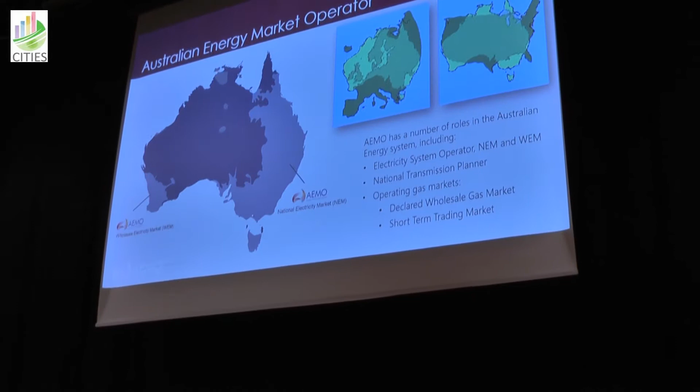So, as I said, I'm from Australia, work at the Australian Energy Market Operator. We've got a number of different roles, I've put some of them up there. We are the electricity system operator in the national electricity market, which is the light grey area.

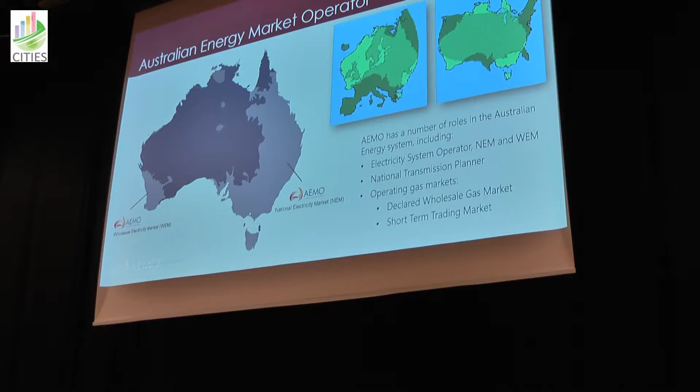That's in eastern Australia, about 85% of the population lives there. We're also a system operator at the wholesale electricity market over in Western Australia, which is the light grey area to the west. There's a few other small isolated systems we're not currently involved in, and then there's a whole lot where there's not really a grid supplied electricity.

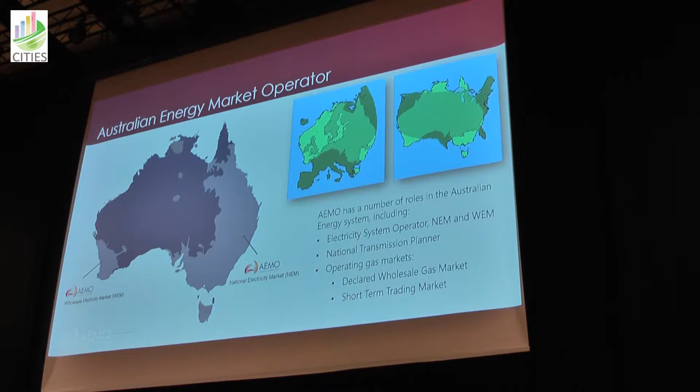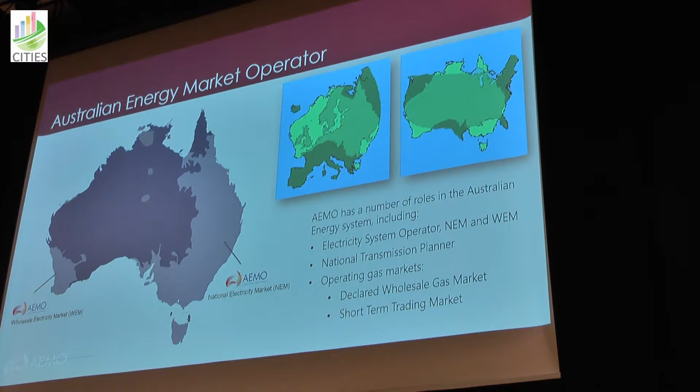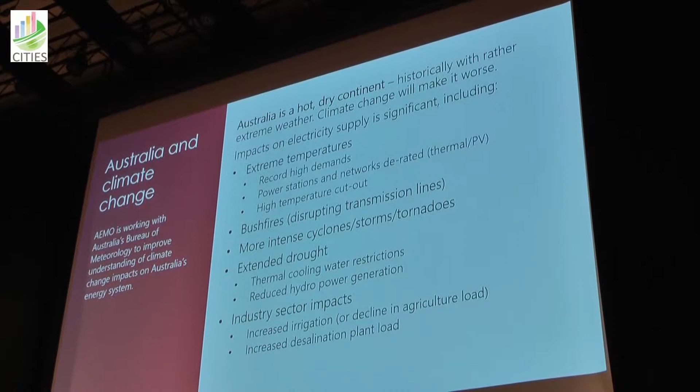There's significant impacts on electricity supply through extreme temperatures, driving record high demand levels, affecting power stations and networks through derating, reaching too high temperatures to operate efficiently, reaching potentially high temperature cutoffs, shutting off power stations.

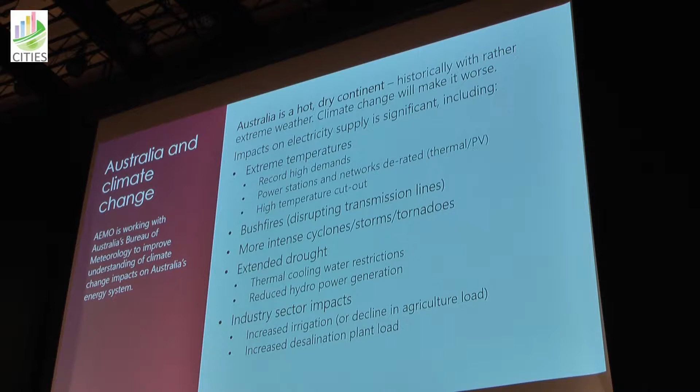Hot and dry climate is great for bushfires. Bushfires may affect transmission corridors, causing lines to be de-energized to prevent tripping of the lines. It drives more intense cyclones, storms and tornadoes that can affect electricity supply infrastructure. Extended droughts can affect the availability of cooling water for thermal plants and reduce water available for hydropower generation.

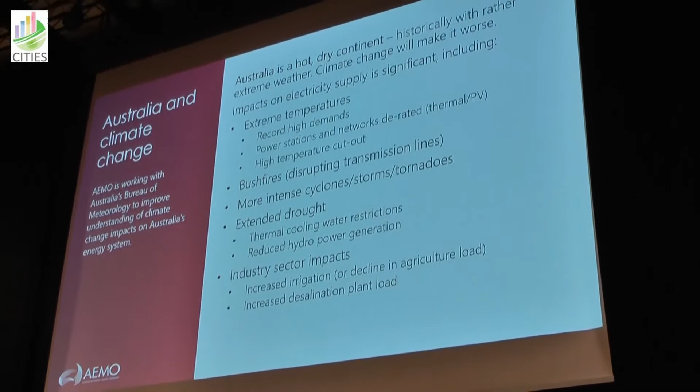There's other impacts to consider when planning the electricity system around industry sectors. What's happening with agriculture when there's long, prolonged droughts? Will we see reduced output and therefore reduced consumption at the processing of agricultural products? Or will we see increased demand because we're using additional water for irrigation and pumping? Then there's additional electricity used for desalination to firm up the water supplies for major cities.

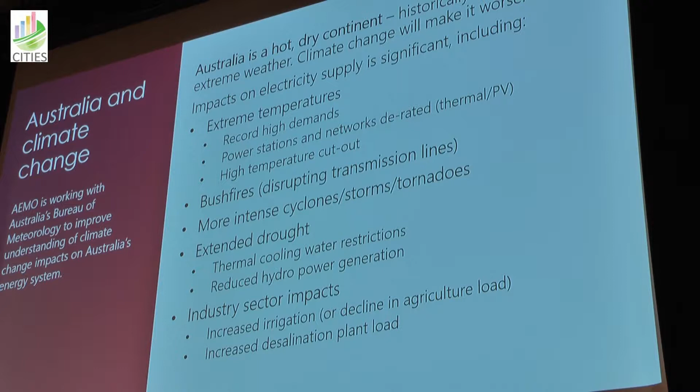So we're working with the Australian Bureau of Meteorology to improve understanding of climate change and its impact on Australia's energy system.

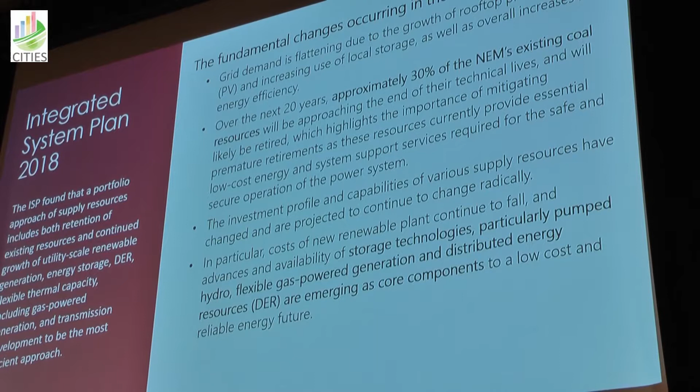I'll try to catch up on time, so I'll skim briefly through that. We do some integrated system plans. This is the last one we did last year, and it's showing the energy system is transforming. We all know that, it's happening in Australia as well. Interestingly, we've seen renewables coming down in price, as we've heard. So pretty much regardless of what scenario we're looking at, the future is renewable.

What's really different is the pace of transformation towards this renewable system and what technologies we're using for firming. Is it going to be battery storage? Is it pumped hydro? Flexible gas power generation, or something else? Could be demand side participation, for instance.

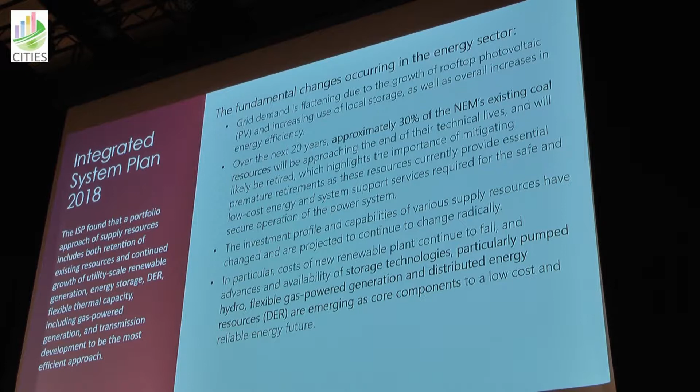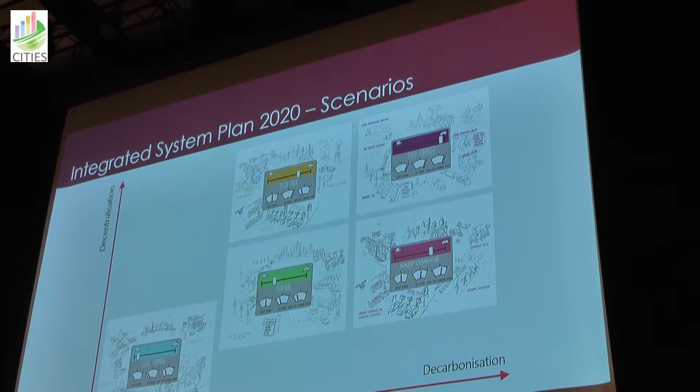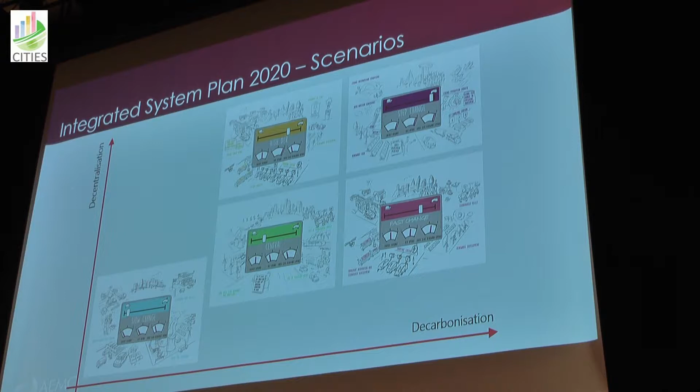We're currently working on our next integrated system plan to be released next year. The draft outcomes are actually to be published potentially next week. We've defined 5 scenarios here, ranging by the slope, the rate of change. The green scenario is kind of a central outlook. If we continue up toward the 2 axes of decarbonization and decentralization, we see there's a scenario in the top corner called step change.

I was about to say I'm pretty proud that I've got this scenario, which I shouldn't be, because that's actually the only scenario where we reach the Paris Agreement. But we felt we need at least one scenario that had that, and last time we did this, we didn't have a scenario that actually did.

It does have a strong focus on the electricity system, but also the interaction with other sectors on the electrification of industry, heating, and transportation included. Generally, the expectation is, based on what we had last year, that there is no silver bullet. The solution to achieve what we want, to get to the Paris Agreement, includes a range of technologies at very large scale deployment.

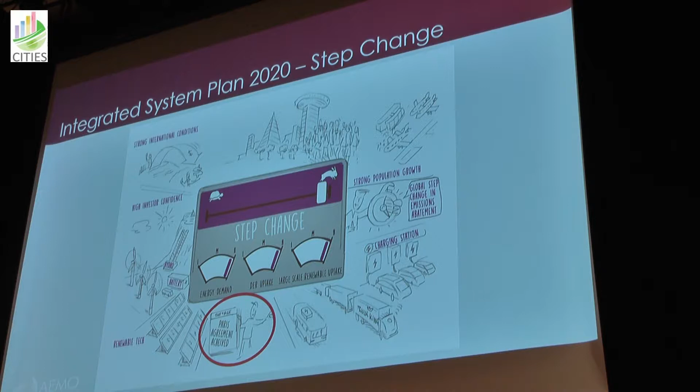The starting point, I'll focus mainly on the national electricity market, the market in the east, which is the bigger of them. It's probably not that much you need to know. It's about 200 terawatt hours of electricity consumed annually, peak demand of around 33,000 megawatts, and close to 60,000 megawatts of installed capacity now. You can see some of the values there, how quickly some of these capacities have been built.

Last year, about 3,000 megawatts of renewables were built alone. Just in the first 2 months, there was another 6,000 megawatts of potential projects announced, seeking approvals at various stages through the approvals process. So we have seen this year a very fast transformation already.

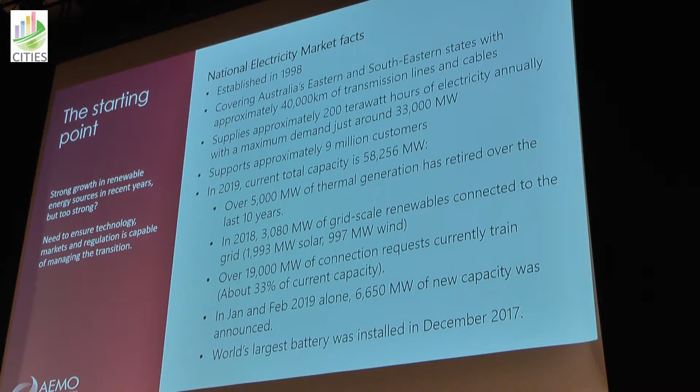But has the growth become too strong? There's a lot of things that need to be taken care of to make sure that we're still providing reliable, secure electricity. And we don't want to be a blocker for achieving a step change scenario.

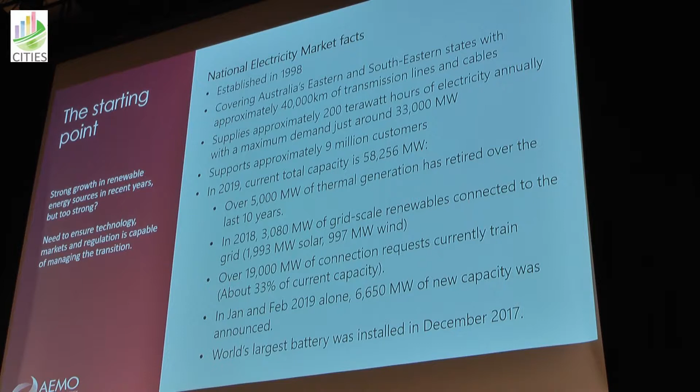So we are working along a range of initiatives to ensure that should we, or the politicians and population of Australia, want a step change scenario, we'll be there to help them. So where we're heading from now, this is a slide I borrowed from Bloomberg.

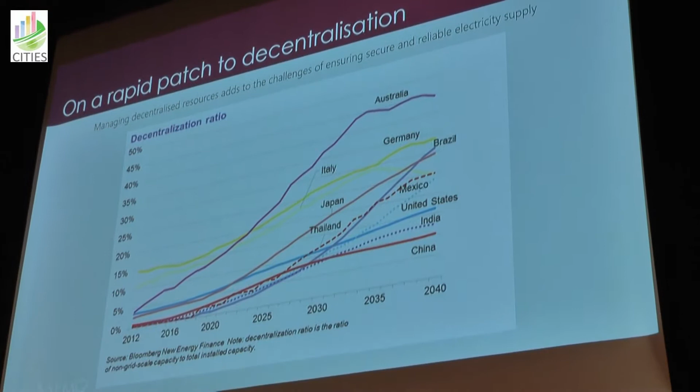A lot of things happening behind the meter, or the decentralization. Australia's gone from being very much focused on big coal-fired power plants to a rapid rise of supply at household level.

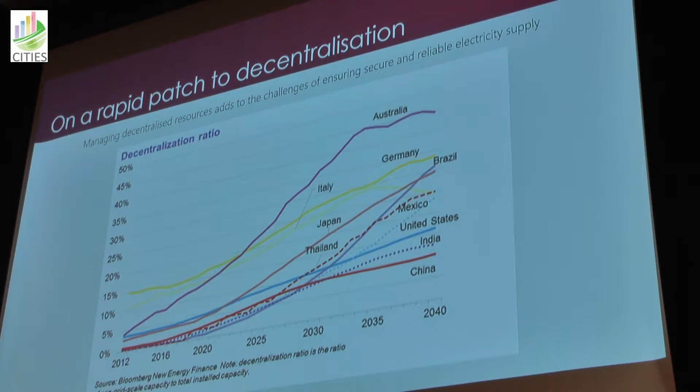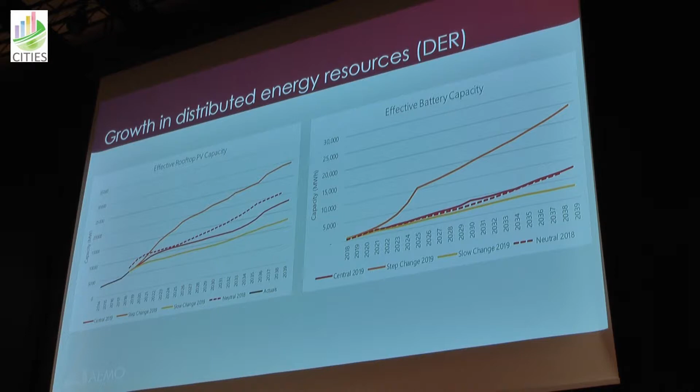This is driven almost entirely by growth in rooftop PV systems, or small-scale PV systems. You can see some of the predictions we have here. I might just remind you, the peak demand of the system is 33,000. You can see the growth of PV there in some of our scenarios, almost getting to that level by 2040.

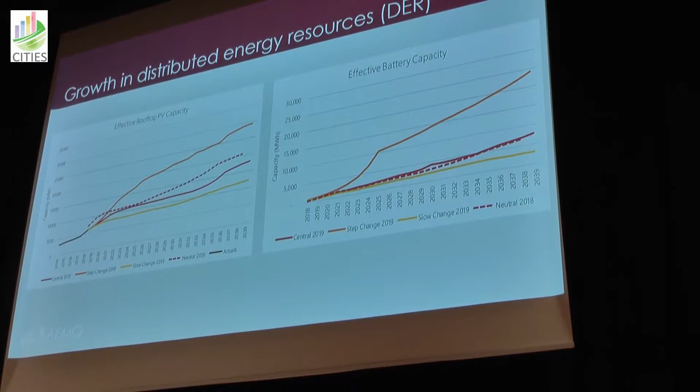We have expectations that there will be a rather significant deployment of battery storage as well, in particular in our step change scenario. This battery storage shows the megawatt hours there. The megawatt, I think, that's assumed by these installations, you can get by dividing that number by 2.

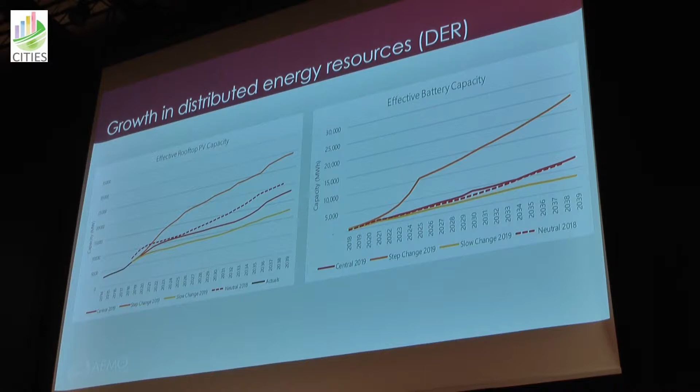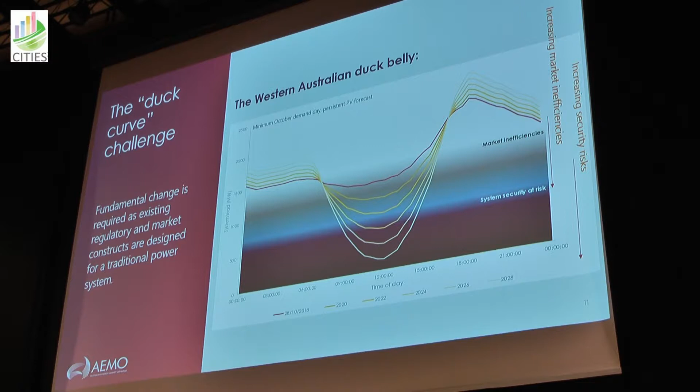And once we get to the black area there, we will actually have an oversupply and we will not have the ability to scale or to operate the system potentially, unless we get ways of reducing the generation from the rooftop PV when we need it.

All this PV generation as well, both small scale and grid scale, has also caused the emergence of, or the growth of, occurrences of zero or sub-zero prices in the market.

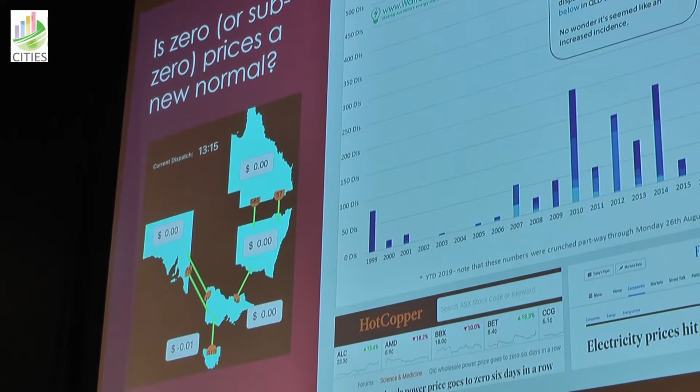Just here, about a month ago, we, for the first time ever, had zero price across the entire national electricity market, as shown to the left. We saw periods of 6 days in a row where Queensland, which was traditionally dominated entirely by coal generation, reached prices that went to zero 6 days in a row. We had prices hitting -1,000, which is the price floor as well.

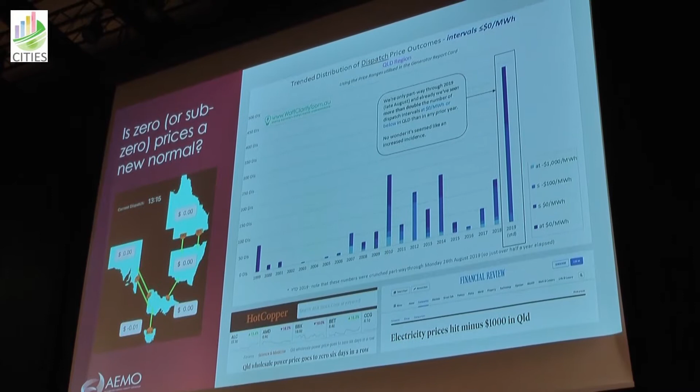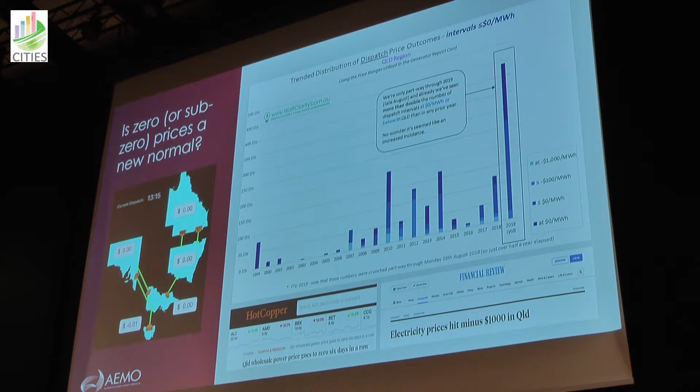And you can see up there the growth in these events, and that's even just based on half a year for 2019. So it seems to be becoming the new normal.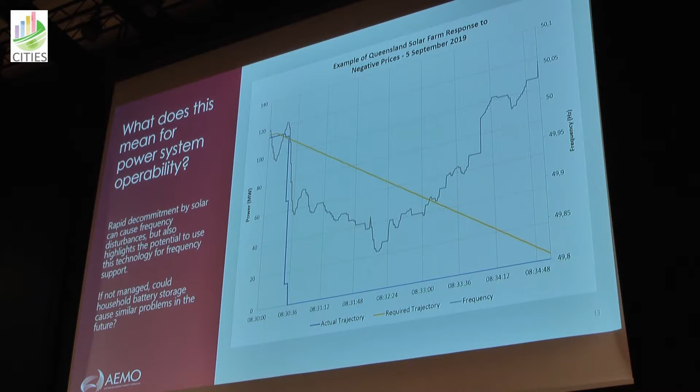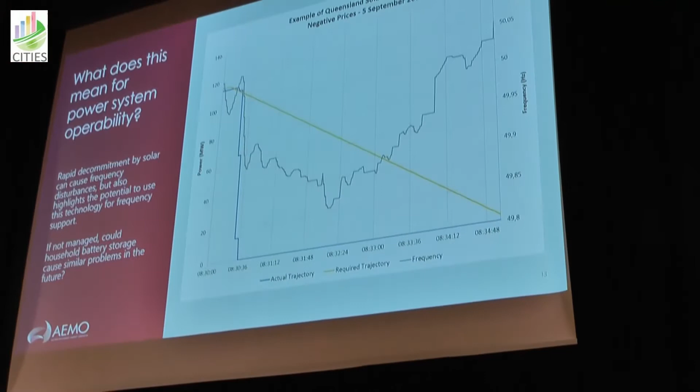And some of this, because it's showing kind of new things happening - once prices, I mean, not when it's getting to zero, but once it's getting to -1,000, it's pretty stupid to actually generate electricity because it's costing you a lot. This is an example of a solar unit that thought, well, I'm not going to generate now, I'm going to shut down - it's the blue line.

And that's happened within 10 seconds, 110 megawatts gone. They regulate extremely quickly. Now, the kind of implied or assumed trajectory is the yellow line. And we need to make sure that we don't get 2,000 megawatts of solar doing that at the same time.

Luckily, that hasn't happened yet, but currently there's no way to ensure that it doesn't happen. Fixing it for the large-scale plants is probably

relatively easy. But what if those price signals at some point are passed on to consumers or automated home systems that decide, oh, the price is -1,000, I'll do something different, and they all react to the same signal? So we need to make sure that we don't get fluctuations and other things happening.

So that's some of the issues we've seen. This is just a summary of what we're seeing.

Negative prices, risk of market fluctuations. Negative prices also deteriorate the profitability of thermal plants we've traditionally relied on for a lot of system services, which they've never been paid for, so there's no market for them. How do we make sure they're sufficiently maintained so we can keep operating the system reliably?

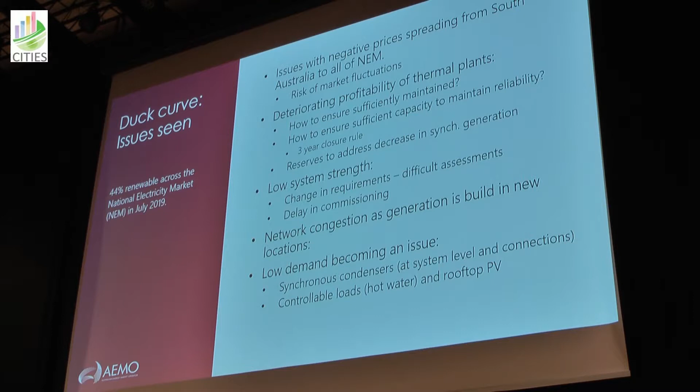These plants are built where the transmission historically hasn't been strong, but the wind and solar resource are good. We talked about low demand and some of the issues around there. Power electronics, condensers might work, but maybe we need to think about how we can use controllable loads to adjust, or potentially we might have to find a way to scale down the rooftop PV generation at times.

Solutions. Traditionally, thinking would be to think big - let's build more interconnectors. We need some of that, but as I said, there's no silver bullet.

We can ensure that there's enough other types of generation built. The government is working on an underwriting program that seeks to ensure we get new dispatchable energy to replace some of the coal generation that will shut down.

But there's more - I should also mention the pump storage arena. The Australian Renewable Energy Agency is promoting some, but Snowy 2.0 is a massive 2 gigawatt system promoted by the federal government in the Snowy Mountains, likely to be built by 2024.

But distributed energy resources, DSP, virtual power plants - a significant part of the solution could actually come from households, from buildings, and this is a good place to talk about buildings, energy efficiency, taking off from what Hans was talking about.

The task in the step change scenario is massive, and avoiding any unnecessary consumption really helps you meet that goal.

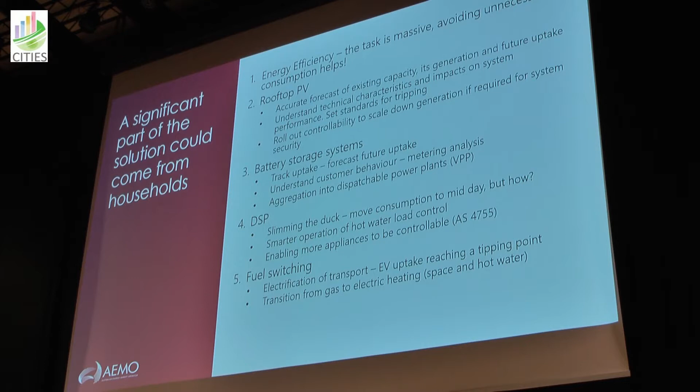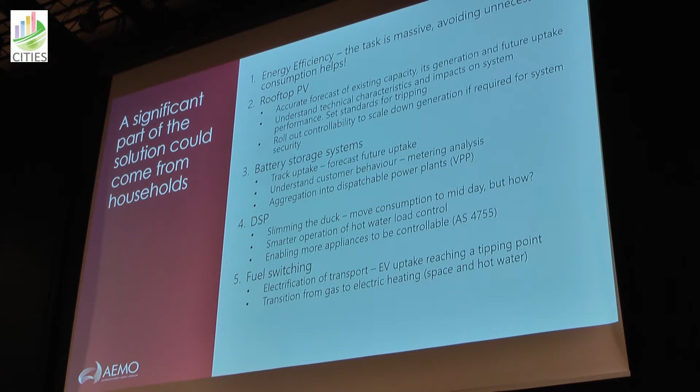And there's a whole lot of work happening around how we can make appliances controllable, and I'll have a slide on that as well. Fuel switching - but I think I'll hurry on to get into some of the more specific details.

So visibility is key, as I said. For rooftop PV, we've been lucky because generally there's an incentive in place when you install a PV system, so people register to get the incentive, meaning we have a pretty good understanding of how much PV is installed.

All that information about the inverter, panels, installation, the meter number, so we can know exactly where it is, is being put into a DER register that will go live from December this year. That will include all future installations, information about inverters, panel types, and all other characteristics.

We've got a DSP portal, so we've got DSP information reported into us. Technical challenges, I mentioned.

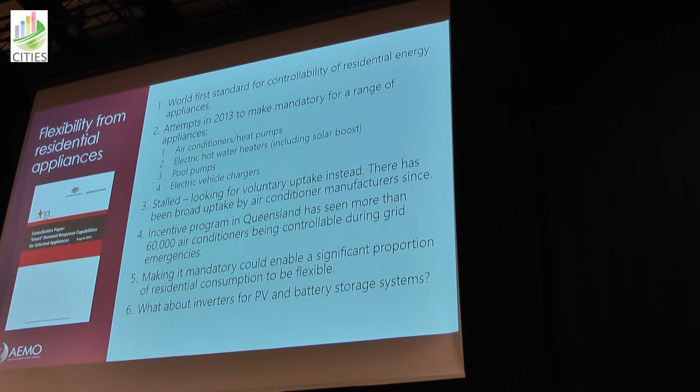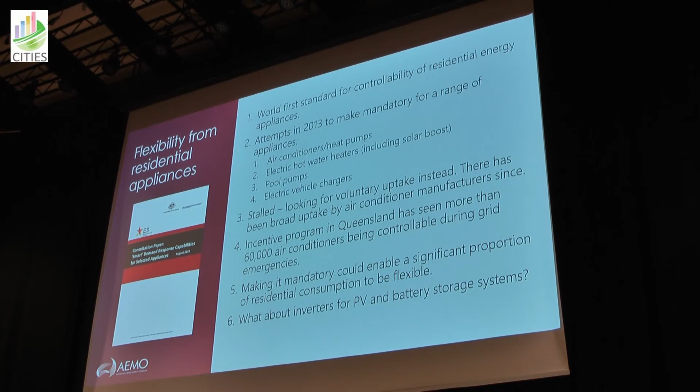It was stalled, but the government would like to see, would this be taken up voluntarily? In particular for air conditioners, that has been the case. There's a wide range of air conditioners available with this functionality. You can simply add in the connection port, add a demand response enabling device or DRED, and then your air conditioner is fully controllable.

A utility in Queensland have had a program with incentives to install these devices along with air conditioners, and they now have 60,000 air conditioners that are being controlled at times of grid emergencies.

Just earlier this year, there's another push to make this mandatory, so all these appliances actually have the functionality that you simply need to plug in a communication device and they can be controlled by the utility. That's currently under consultation, and there's some discussion about other types, such as inverters for PV systems and battery storage.

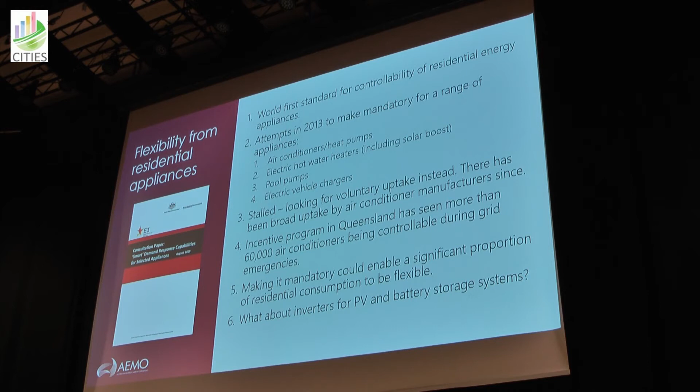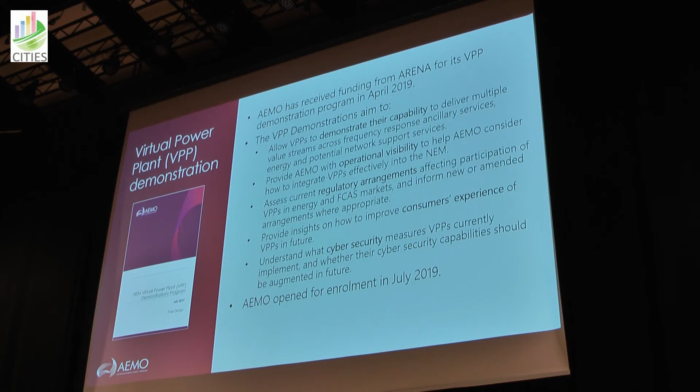So we're open for enrollment just a few months ago, and we've yet to see any kind of progress to the next stage, actually to sign up anyone for a real trial.

So that was my very quick summary of what was happening in Australia, and I guess, as I said, a lot of things happening, all the way down to the building side, but we need everything that we can think of to make this work. Thank you.